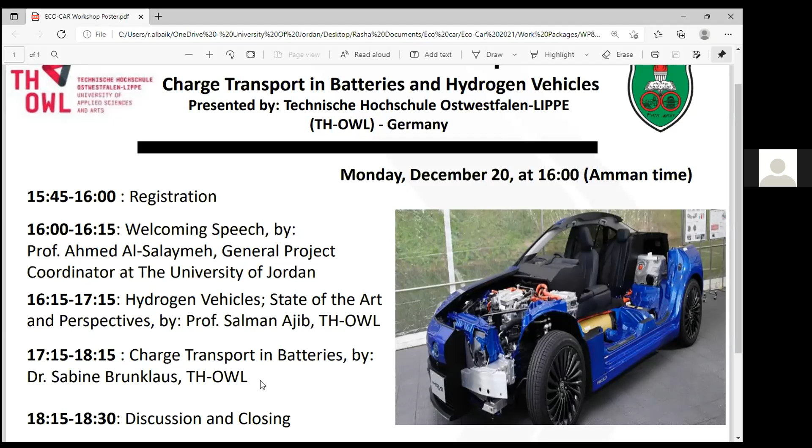So let me give a brief of the agenda of our workshop for today. We'll start with the welcoming speech by Professor Ahmed, the General Project Coordinator at the University of Jordan. And we will have another presentation on hydrogen vehicles, state of the art and perspectives, by Professor Salman Ajib. And then we will have another presentation by Dr. Sabine regarding charge transport in batteries. This will be for 1 hour, and then we will have 15 minutes discussion and questions for

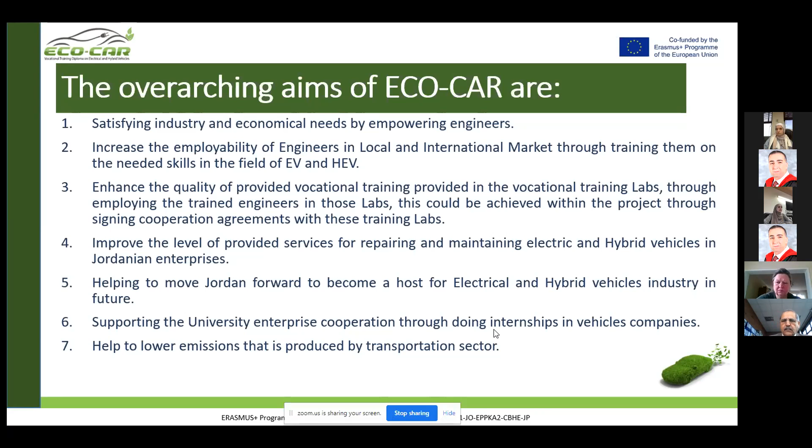Yeah, 2-3 weeks ago the COP in Glasgow finished, and they announced that now they want to have only a 1.5 degree temperature increase in the atmosphere, which means it would be more dependent on environment friendly measures.

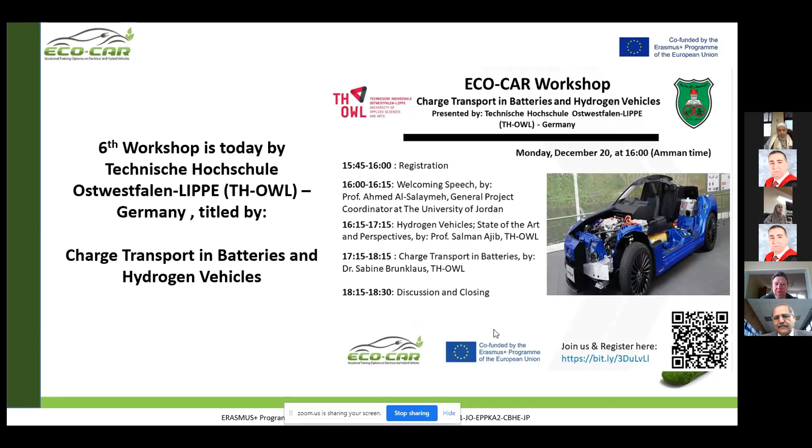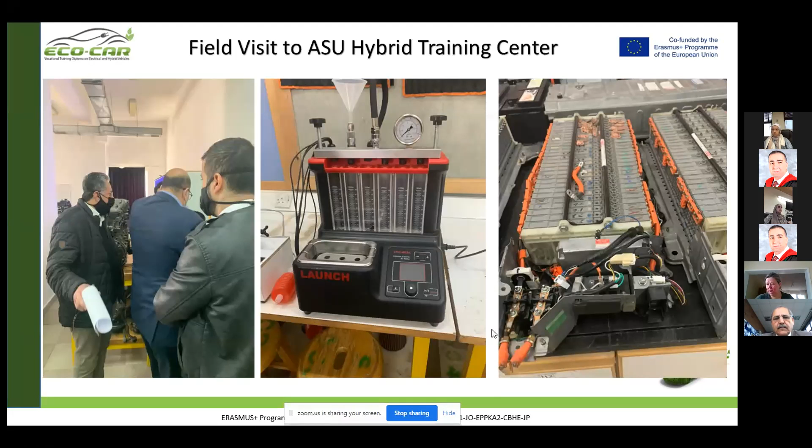Yeah, as I mentioned about the establishing of the labs, now we have the tender, and soon we'll have the equipment in different Jordanian universities. So our students, our trainees will also be qualified in this field. These are some labs at the Applied Science University, and this is an example of our visits to the car companies in Jordan to check with them the competencies that they need from the students. Next.

And about the courses, we have now started developing the curriculum, and this is the most important work package that we have. And within 3 months, all courses and modules will be ready in English, and then we will translate them to Arabic, and we will upload them on the platform, which will be open to all. Next.

Yeah, and as we said, our target groups are academic staff, students, also customers in electric and hybrid cars, and also employers of vehicle enterprises. Next. As we said, we have continuous quality assurance for the project, which is led by our partners in Greece, and therefore please at the end of this workshop evaluate it, because this evaluation is very important for us. Finally, about dissemination, we'll have many dissemination activities, and we'll also conduct some info days.

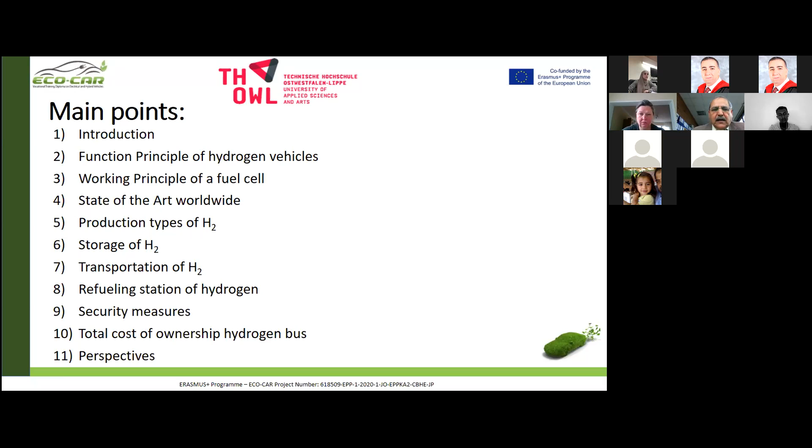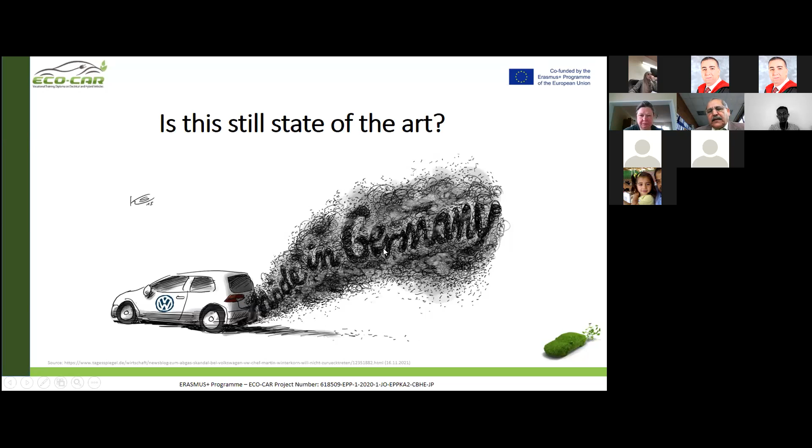That is the state: conventional cars make, yes, a great emission of CO2 and other pollutants. And of course, we don't want this situation. So therefore, there are many possibilities to avoid the CO2 emissions from cars. And of course, e-cars, hybrid cars and hydrogen cars are promising technologies to actually decrease these pollutant emissions, CO2 and other pollutants.

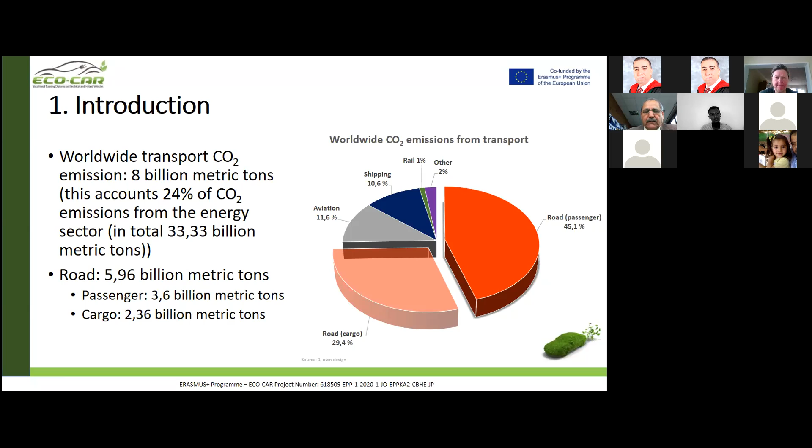Worldwide, transport vehicles make CO2 emissions of about 8 billion metric tons. And this accounts for about 24% of CO2 emissions from the energy sector. The total CO2 emission amounts to about 34 billion metric tons. From these, as I said, 8 billion are from transport vehicles, and from these, about 6 billion metric tons in total are for passenger cars and for cargo. In detail, about 3.6 billion metric tons CO2 from passenger cars, and about 2.4 billion metric tons from cargo.

And in total, as you see here, worldwide emission from transport is about 45% from passenger cars, about 30% from cargo, heavy transporters, about 11.6% aviation, shipping has about 10.6%. Railway, you see here, is a very, very small percentage because many railways are electrified. That means most of the railways use electricity as drive energy. Other about 2%.

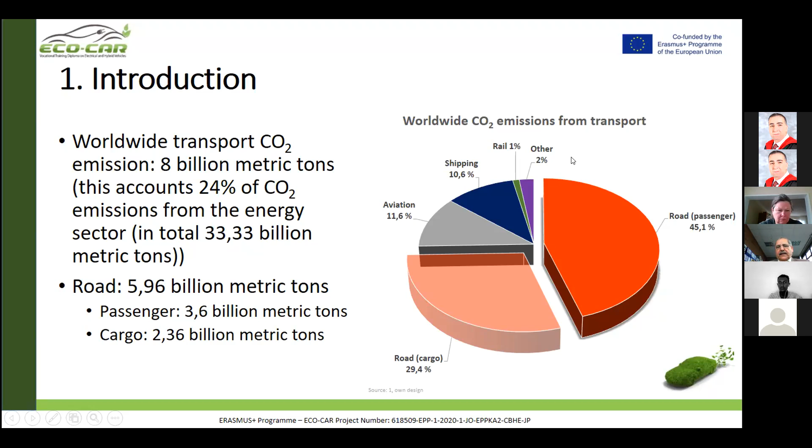Now, how can we tackle the net zero emission goal? Either stopping driving internal combustion engine vehicles, which is of course not possible, at least until now, or we have to shift the technology to other drive energy sources, and these could be biofuels, battery electric mobility, and fuel cell electric vehicles. The two last options are included in the objectives of our project. And we hope that at the end of the project, we can provide at least some information and some courses about the possibility of using these two technologies in the near future.

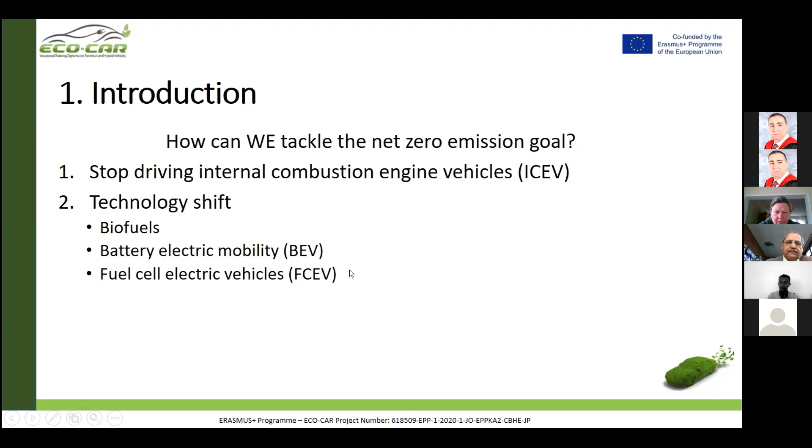So now, what is the function principle of hydrogen vehicles? We need a hydrogen tank, a hydrogen supply system, and of course, the heart of the system is the fuel cell stack to produce electricity. How is this realized? The fuel cell needs air, the oxygen and hydrogen supply, and through this process the fuel cell can produce current to charge batteries, and of course, as output, we have water and heat. We produce the current to charge the battery, and this battery can then, through a power control unit, drive the electric motor of the vehicle.

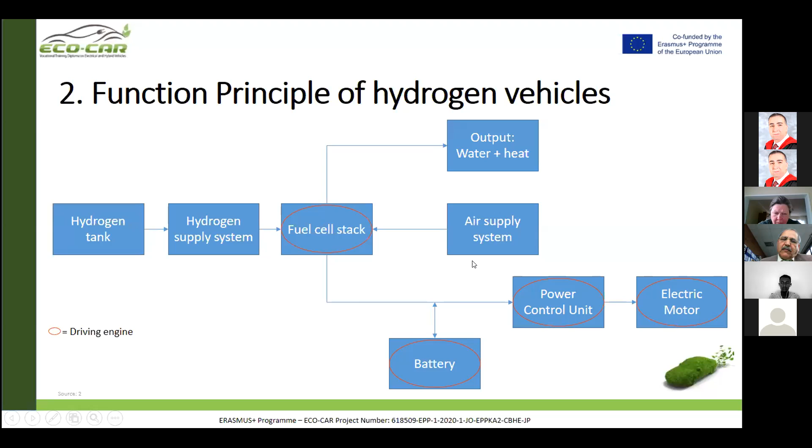So that is the sketch of the diagram of the hydrogen vehicle. And now we find this function scheme as components in the car. As you see, the heart of this process is the fuel cell stack. We need a hydrogen tank. We need oxygen, of course, from the air. Then we have our battery pack, our electric traction motor, the transmission system, power electronic controller, DC to DC converter, cooling system,

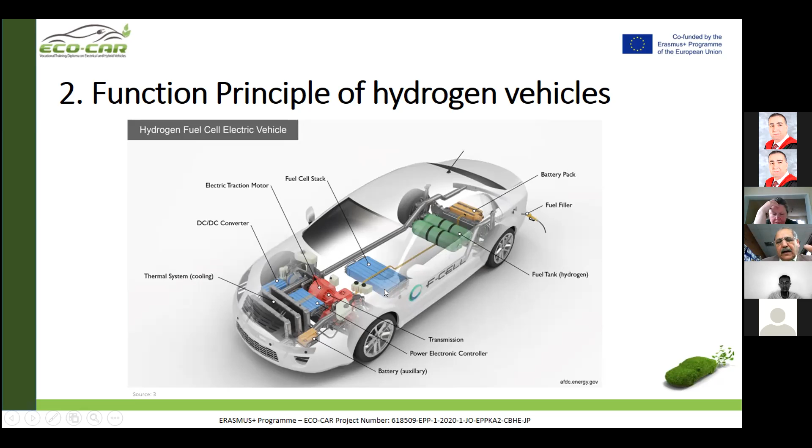and of course, for all cases, we need an auxiliary battery if the system cannot work for one reason or another. Then the car has an auxiliary battery to drive the motor for a short way, to be able to go to the workshop where the car can be repaired.

So how does the fuel cell work? The working principle, I think, is clear for many of you, but I want to present it shortly. As you know, the fuel cell has two important parts, anode and cathode, and we have the electrolyte here in the middle, the proton exchange membrane. Of course, we need hydrogen and we need oxygen, which we can take from the air. At the proton exchange membrane, the reaction occurs as follows: at the anode, supplied hydrogen splits catalytically into protons and electrons.

Then the protons pass through the membrane to the cathode. Yes, here. And electrons create a current output with an external load circuit to the cathode. As you see, that is our electron flow. And oxygen molecules react with the protons and the electrons. And at the end, we have here water and heat.

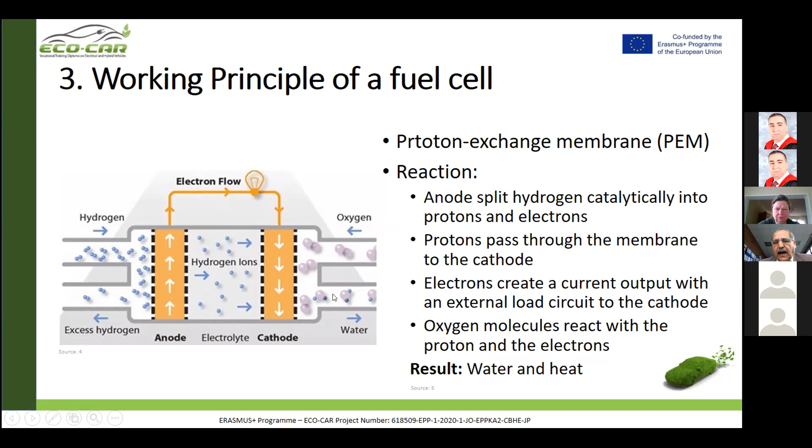So now I want to go into more detail about the polymer electrolyte, only as an example of electrolyte material. In this membrane, the electrolyte is a solid, special plastic material for the fuel cell. In this case, water reacts at the anode to form oxygen and positively charged hydrogen ions, our protons. So as you see here, we have oxygen plus 4 ions; the reaction is that water is split into oxygen and positive hydrogen. The electrons flow through an external circuit, as we see here.

And the hydrogen ions selectively move across the polymer electrolyte membrane to the cathode. At the cathode, hydrogen ions combine with electrons from the external circuit to form hydrogen gas. And the two reaction equations, as you see here: at the anode, water will be split into oxygen and hydrogen plus 4 electrons, and at the cathode we have the hydrogen plus the electrons. As a result, we have our wanted hydrogen.

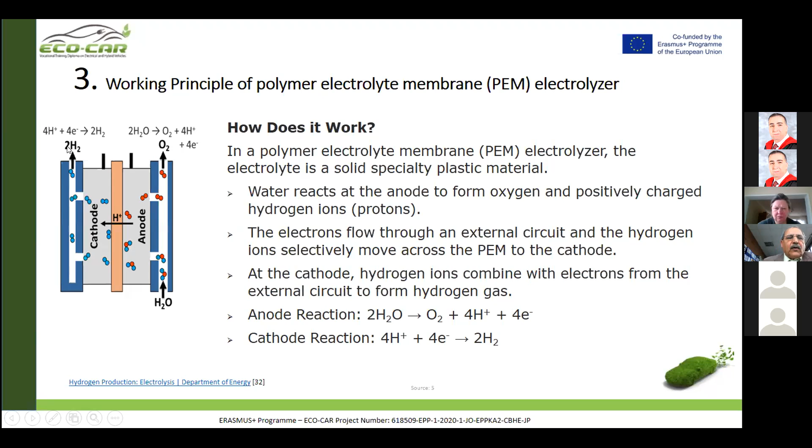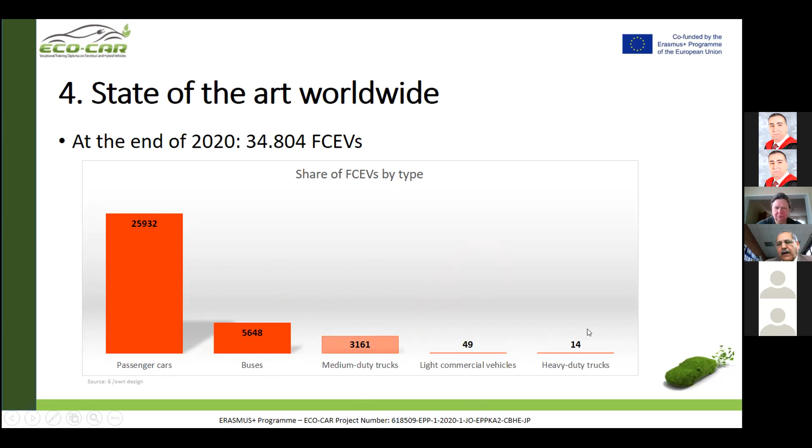So now about the state of the art worldwide. As you see, we have worldwide about 35,000 fuel cell electric vehicles, and these are distributed in about 26,000 vehicles as passenger cars, about 5,600 buses, about 3,000 medium duty trucks, about 50 light commercial vehicles, and heavy duty trucks, about 14 pieces.

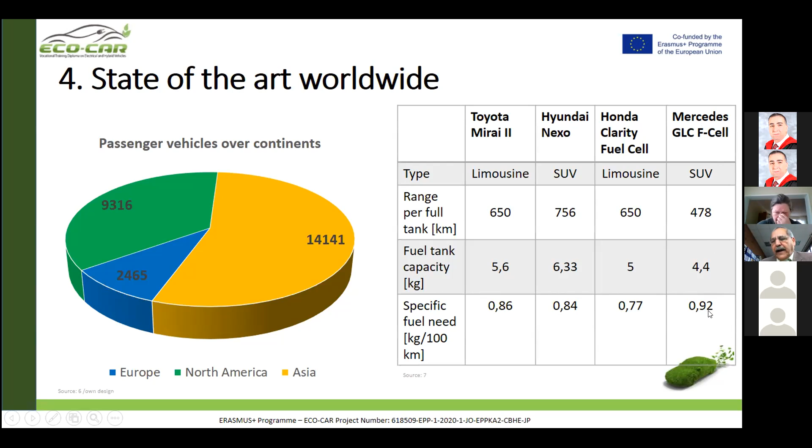You see the specific need is about 0.84. And Honda Clarity Fuel Cell as limousine is only 0.77. In contrast, the Mercedes GLC fuel cell, although this is also a comfortable vehicle, needs somewhat more than all other vehicles, about 0.9 kilograms per 100 kilometers.

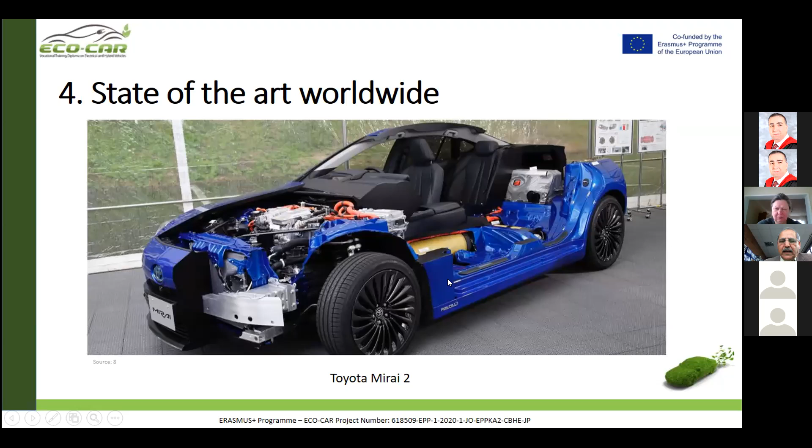So that is actually a picture of what you see in our poster. That is Toyota Mirai 2. And for your information, I wanted to show you the two most known hydrogen cars, Hyundai Hybrid SUV and Mercedes-Benz GLC Hybrid.

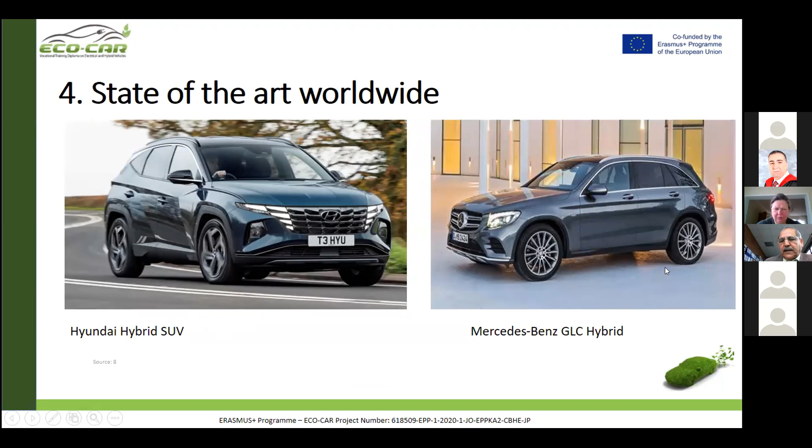So what about the buses, that means the big vehicles? The total number worldwide, updated only to 2020, is about 5,300 buses. Most are located in China. The major original equipment manufacturers are Foton AUV in China, Yutong Bus in China also, Toyota in Japan, and Hyundai in South Korea.

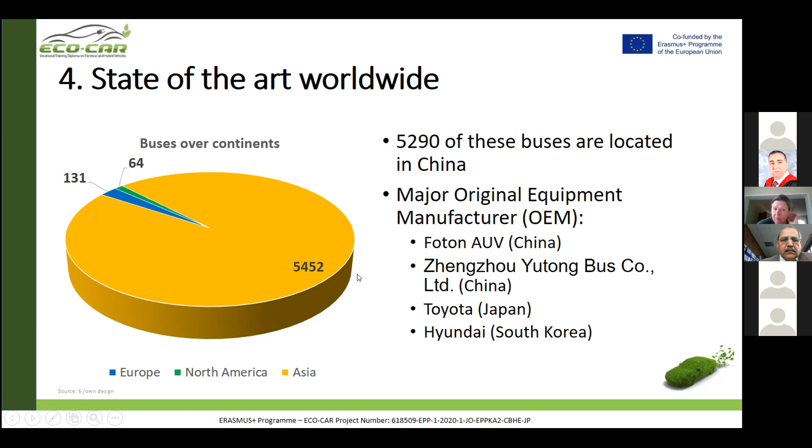As you see here, the buses by continent: the most is in Asia, North America is about 64, and in Europe the number is relatively low. These are some pictures of hydrogen buses. Here is Yutong, only for impression, and the different manufacturers, and you see the buses are very much wanted, especially for transporting tourists or large numbers of pupils.

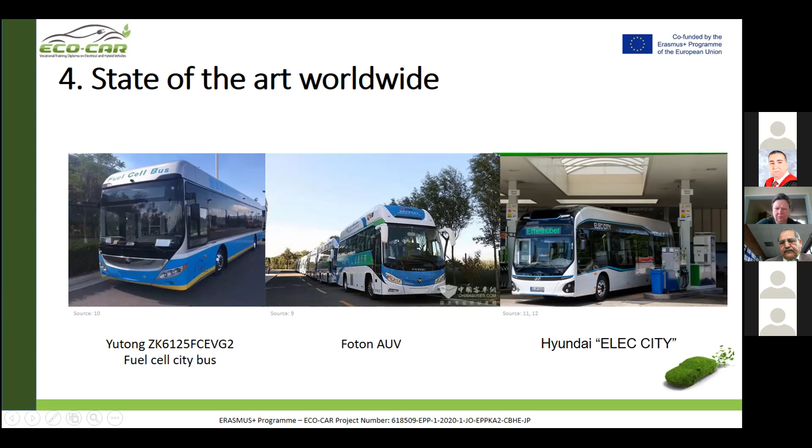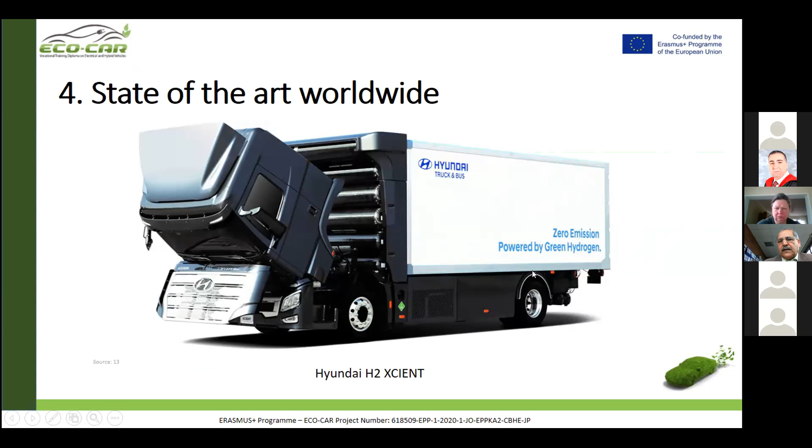Also in trucks and heavy transporters, there are some vehicles driven with hydrogen, zero emission, powered by green hydrogen. So now we spoke about the importance of hydrogen vehicles and the state of the art, and because hydrogen is the main fuel for such types of cars, we have to know how we can produce hydrogen.

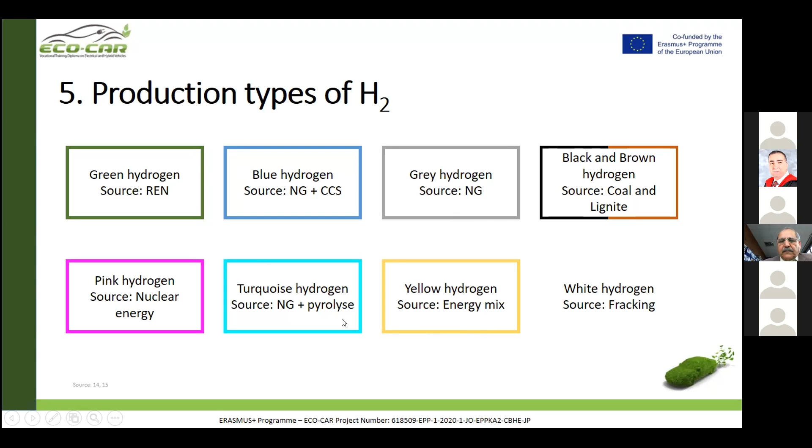It is yellow because here we have an energy mix, that means renewable energy, energy from carbon, and energy from nuclear. And white hydrogen is through fracking, that means through drilling into the earth; it is a hydrogen reserve in the earth. I don't want to explain every one of these possibilities, but as examples I want to show you the possible amounts of hydrogen and what we need as input and get as output in these three examples here.

As an example, when we take the steam methane reforming of methane and water, we have, for example here, 1,989 kilograms of methane and about 4,468 kilograms of water, and we have to supply 5.7 megawatt hours.

In this case, we get 1,000 kilograms of hydrogen, and the other is CO2, which can again be used, for example, for producing methane or for other purposes.

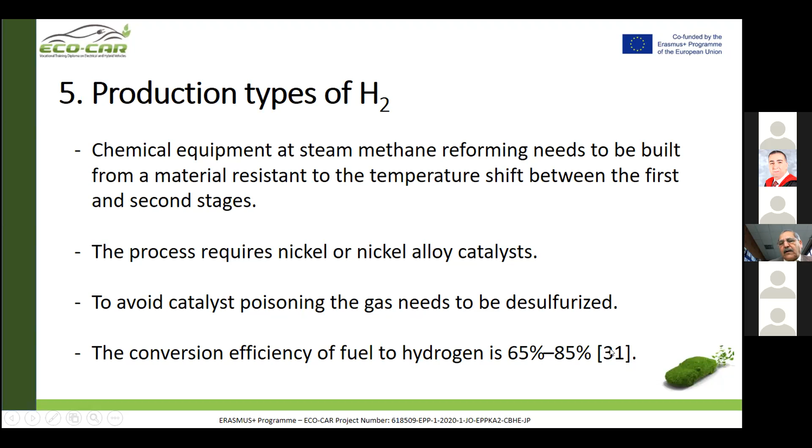So that was only an example, and for the other kinds of hydrogen production, I will only mention the possibilities. For gray hydrogen, we need natural gas or methane, in this case through steam methane reforming. Then we have black and brown hydrogen, where we gasify black coal or lignite. Then we have blue hydrogen from natural gas through steam reforming with carbon capture and storage.

I mentioned it before. Green hydrogen is green because we use only renewable energy resources to produce the hydrogen through electrolysis. Then we have pink hydrogen from nuclear energy through electrolysis. Turquoise hydrogen needs natural gas through pyrolysis. Then yellow hydrogen, electricity mix.

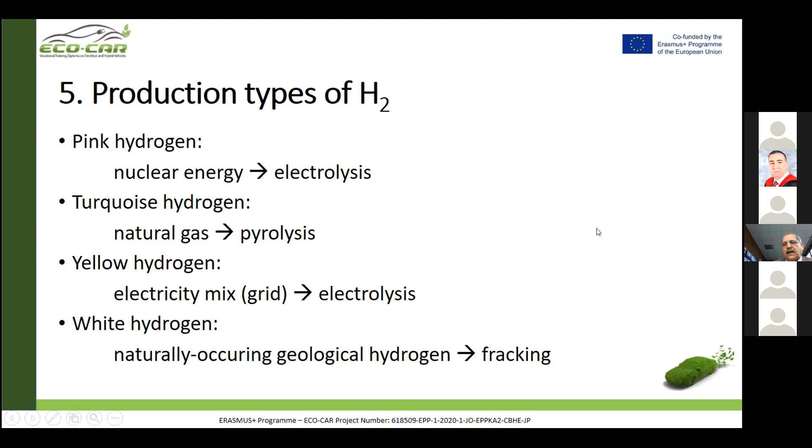Here we take the energy from the grid, and this energy is mixed from different energy sources, through electrolysis. White hydrogen is naturally occurring geological hydrogen with fracking. So that was about the possibilities of production of hydrogen.

And now, what about the production of hydrogen worldwide? You see, we have about 70 million tons of hydrogen produced through natural gas. From coal, we have about 21 million tons, mostly in China. From oil and electricity, about 1.9 million tons.

As a secondary product from other processes, we have about 50 million tons, for example from fertilizer production. And you see here the sources of production of hydrogen. As you see, natural gas is the main source. Coal is about 23% and oil only about 2%.

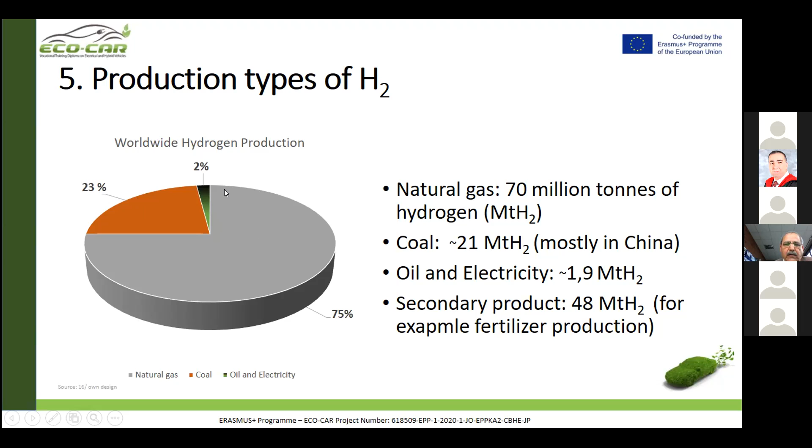So now, how can we store the hydrogen? Due to its physical and chemical properties, costs are higher than those for other energy sources. That is normal because hydrogen has to be stored under high pressure. Otherwise, we need a very big volume. And of course, high pressure also needs energy to produce it, but that is possible. Therefore,

I will here present the most used methods for storage of hydrogen. Either we can store it physically, based on compression, cooling, or a combination. That means compressed gaseous hydrogen. The needed pressure, as I said, is up to 700 bar. For example in Beijing, Sino Hydrogen is the company which uses this method. Then we can liquefy the hydrogen.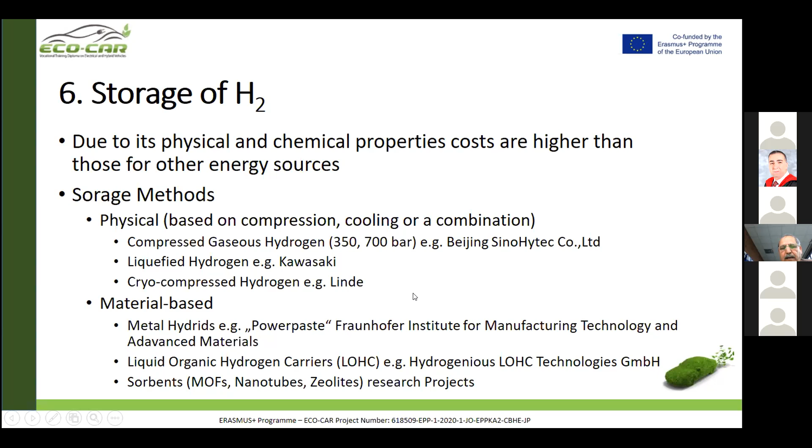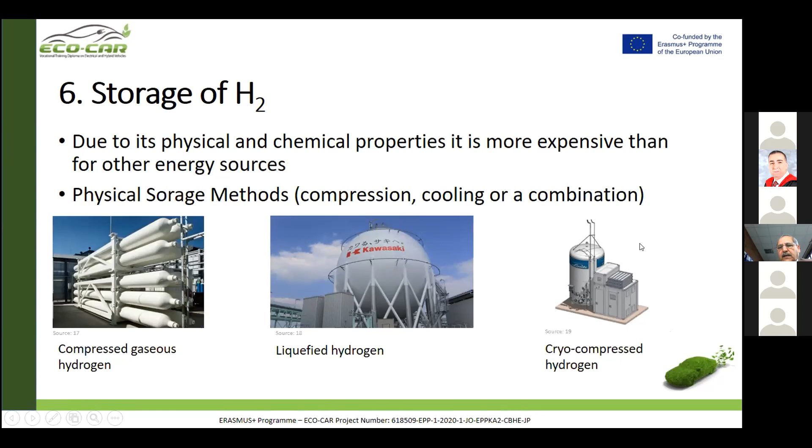Actually these three types are in research. They are not known as a big commercial market. These are only research results. So, as I said, the physical storage methods are compression, cooling, or combination. You see here compressed gaseous hydrogen in very big and long tubes, or liquefied hydrogen from Kawasaki. And cryo-compressed hydrogen, of course at very low, cryo temperatures.

So, material-based storage methods. You see here the tubes, metal hydrides such as PowerPaste, and liquid organic hydrogen carriers, chemical storage here, and sorbents, for example zeolite, metal organic framework, or nanotubes.

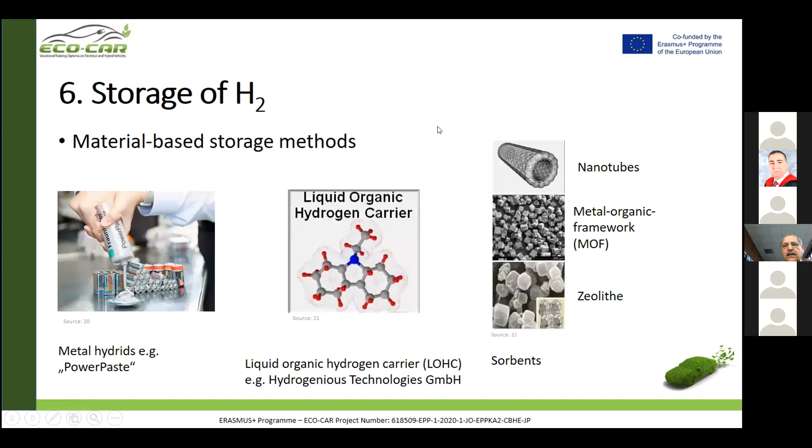So now, how can we transport the hydrogen? The methods used to transport hydrogen are either as liquid hydrogen, LH2, or through ammonia, NH3, and then we can split the ammonia into nitrogen and hydrogen, or as the liquid organic hydrogen carrier, LOHC, which we mentioned here. The most promising one until 2030 is liquid hydrogen, because of the cost, of course. Ammonia is in research, and liquid organic hydrogen carriers also as a research topic.

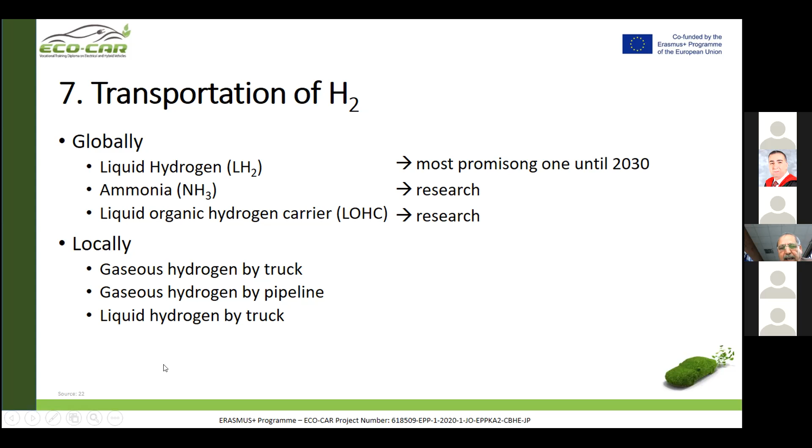That is globally, in ships, a known method for transporting hydrogen. Locally, that means over near distances, we can transport hydrogen as gaseous hydrogen by truck, as gaseous hydrogen by pipelines, or as liquid hydrogen by trucks. Gaseous hydrogen by truck is suitable for short distances and small amounts. Gaseous hydrogen by pipeline for large amounts for industry purposes, and liquid hydrogen by truck for distances greater than 300 kilometers, because in this case the mass of transported hydrogen will be more than as gaseous hydrogen.

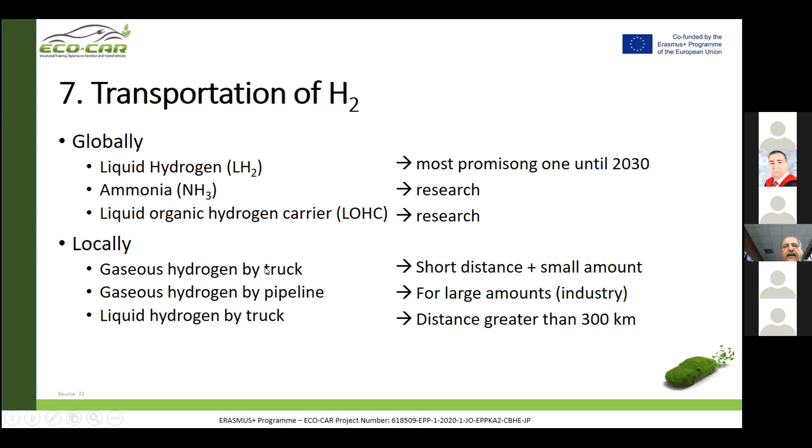Here as an example, I want to show you the ammonia production Haber-Bosch process, and how from ammonia we can produce hydrogen, in the opposite direction. For this process, we need a pressure of at least 200 bar, a temperature of about 450 degrees, and the catalyst is an iron-based catalyst. And this is the equation in two directions.

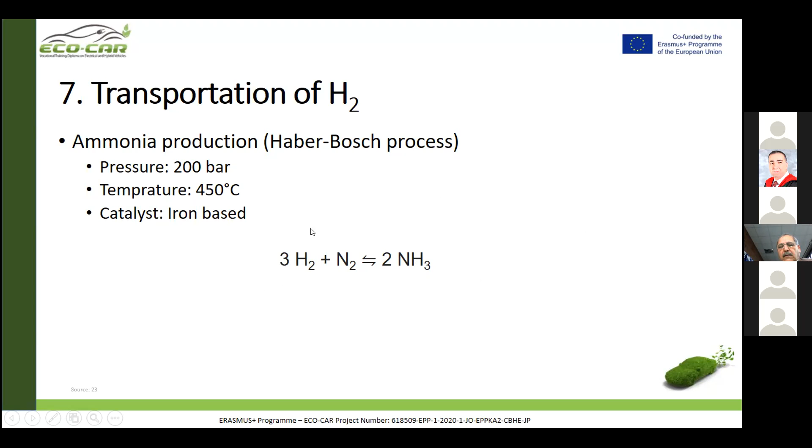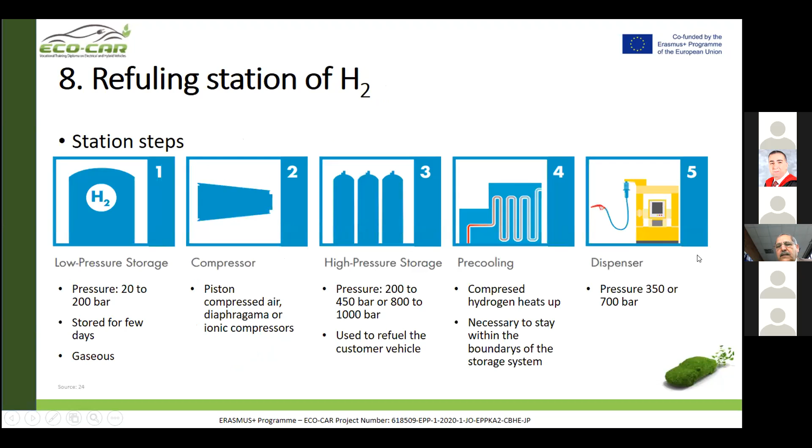So then what about the ownership of these refueling or refilling stations? Most are state stations, although about 75 are public stations, and the pressure of these stations is different according to this scheme we mentioned, either 350 bar or 700 bar or both.

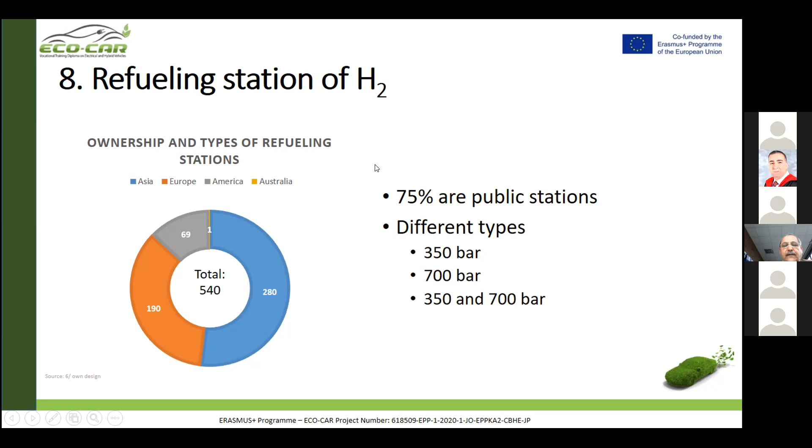Now about the stations: the distribution of hydrogen stations worldwide is about 540 stations in total. In Europe about 190, in America about 69, a very small one in Australia, actually. And in Asia, mostly in China, about 280 stations.

So we come now to the security measures. As you know, hydrogen stations are under high pressure, and therefore the security measures must definitely be kept. That means they have to be given a very high consideration.

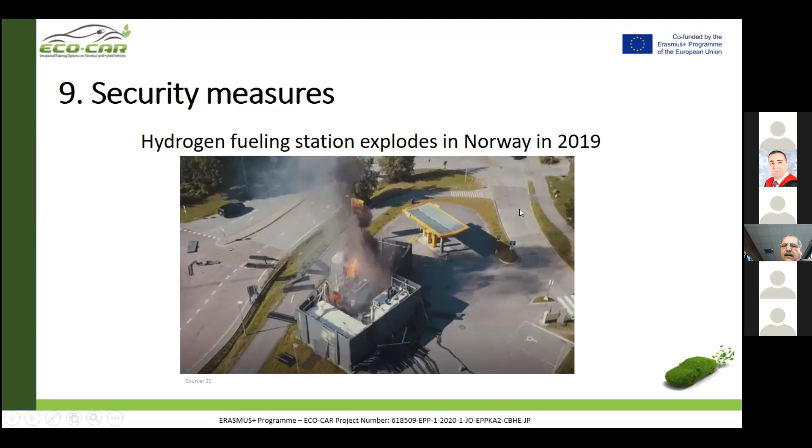And of course, this picture we don't want to see often. This picture was an explosion in Norway in 2019, and therefore there are many security measures which have to be considered in the installation of such hydrogen stations. And of course, security measures must also be considered in transportation and production of hydrogen.

Some of these measures: use non-combustible materials for the buildings of the refueling station, install hydrogen sensors at the exhaust of the tank, station, and the car, avoid ignition sources near the storage area. If a fire or leak is detected, an automatic shut-off is activated near the storage system. Classified electrical equipment should be used.

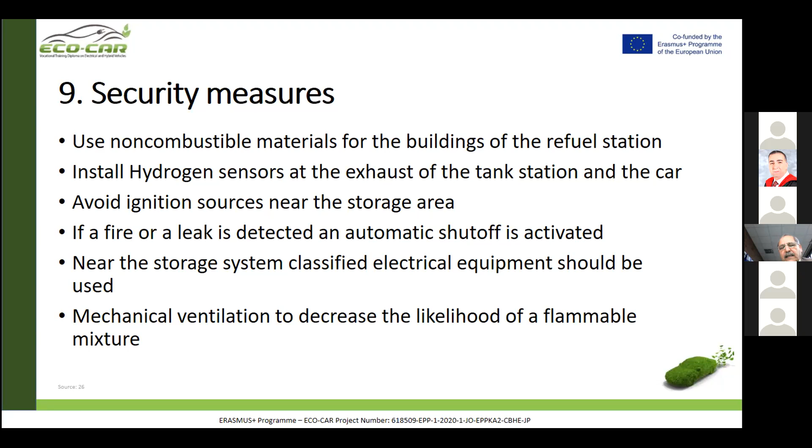Mechanical ventilation to decrease the likelihood of a flammable mixture. That means ventilators must be usable in case of danger. If an explosion occurs, the fire-fighting devices must be put to work, and also, when possible, mechanical ventilation must be put in operation to decrease possible incidents or accidents in the station or in the building.

So now we come to the economic part of using hydrogen vehicles: the needed investment and the cost of operating such hydrogen vehicles. This is based on a total cost of ownership analysis; subsidies are ignored in this case to see the basis of our calculations. We have no subsidies here on either vehicle purchase or fuel, and purchase and operation costs are for 2019.

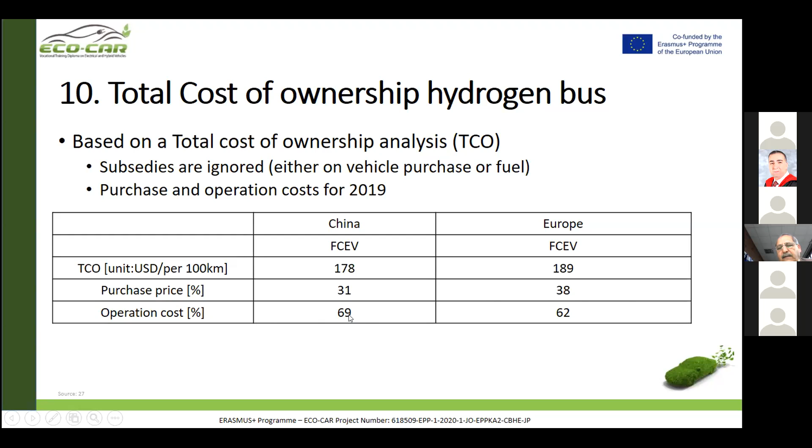You see here in China the cost per 100 kilometers for fuel is about $178, and in Europe about 190, somewhat more. That is, I think, realistic, but not much more. Purchase price in percent is here 31 and here 38 of the total price. And operation cost about 70%, in Europe about 60%.

Based on total cost of ownership, the purchase price here is in $1,000 per vehicle. In China, depending on the kind of vehicle, a fuel cell electric vehicle is about 314 or 315 thousand dollars per vehicle. In contrast, an internal combustion vehicle is only about 77,000. And in Europe it is about double China in both.

And operation costs are somewhat higher in China than in Europe because of providing the components for the vehicles. And here in Europe it is again higher than in China. The break-even with internal combustion vehicles in China is estimated to be 2027, and in Europe 2024.

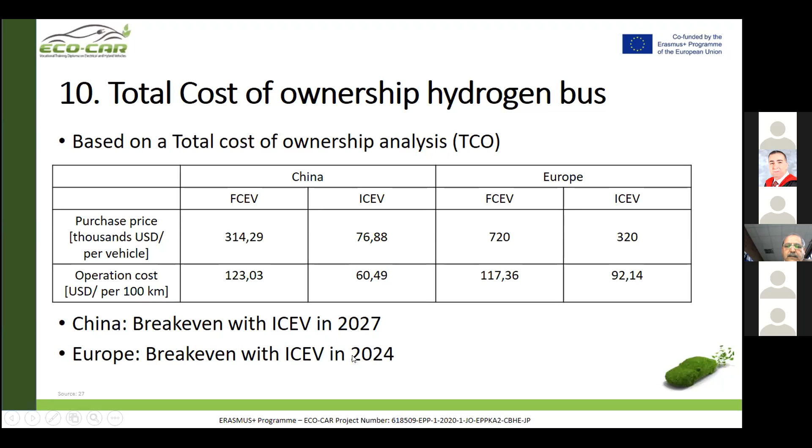Professor Salman, I just want to notify you that we have only 3 minutes. Yes, okay, thank you very much. Okay, I can make it faster.

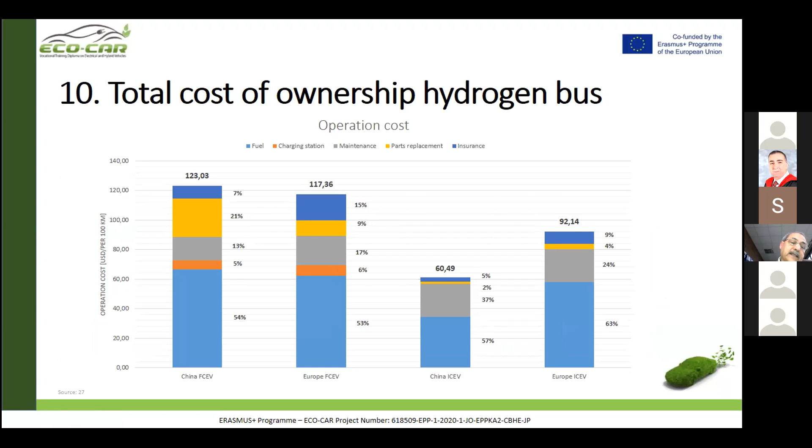Good. Here also operation cost, again, depending on the operation cost per 100 kilometer.

So then, yes, I come to the last slides: perspectives of using hydrogen vehicles with fuel cells. Decrease manufacturing costs, which is needed to make the spreading of hydrogen vehicles possible and economic, and increase efficiency, also long-term stability. Support technology acceptance, as good as the used products powered by fossil fuel. Expand the infrastructure with the long-term goal of nationwide coverage, cost competitive.

Then encouraging carbon-neutral production of hydrogen with an increased installed capacity. In China, it is planned to make about 100 gigawatt by 2030. In Europe, about an 80 gigawatt initiative. In Germany, about 5 gigawatt by 2030.

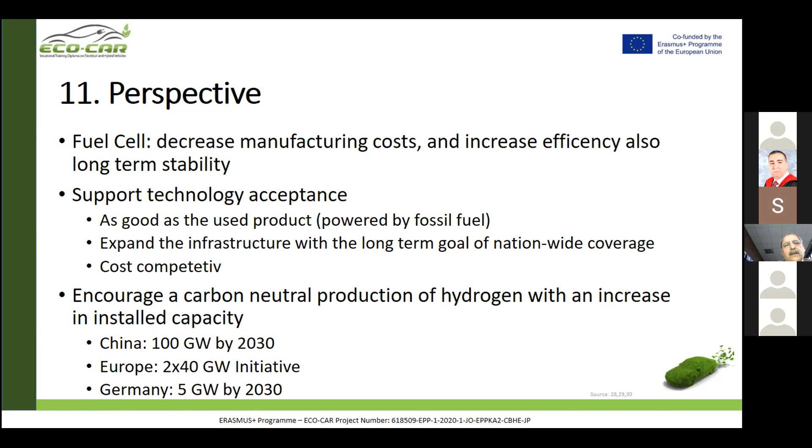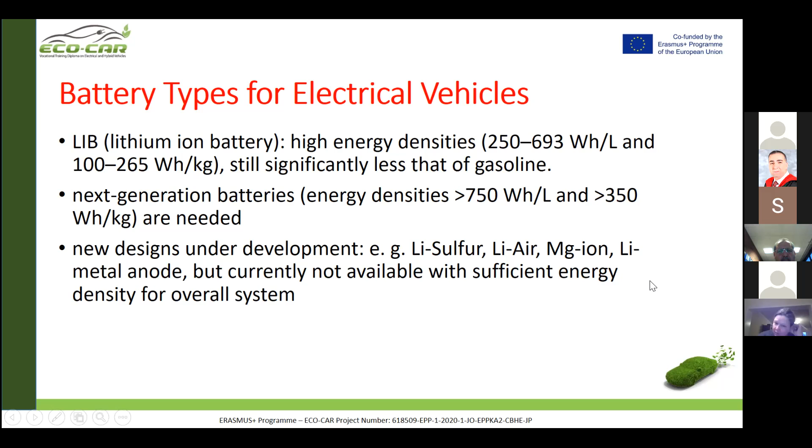And one word about these lithium metal anode batteries. They are currently not considered very safe, because if the battery breaks and the lithium is exposed to humidity and air, you will have a catastrophe. The lithium will react with water, and this battery will catch fire.

Now I come more to the transport of charges in these batteries. In principle, a battery or accumulator is built of a stack of galvanic cells. Let's have a look at these galvanic cells. A very simple galvanic cell is built of two electrodes lowered into an electrolyte. This electrolyte can transport ions, mostly ions that are in solution in this electrolyte. The electrolyte is usually liquid. It can also be a molten salt.

If you divide these two parts and have a different electrolyte for each electrode, then you have two halves of one complete cell, or two half cells. For example, one zinc electrode and a copper electrode. You need to connect these electrolytes by a salt bridge, or have in the middle a porous membrane that allows for the exchange of cations and anions, so that the electrons can still flow in the outer circuit.

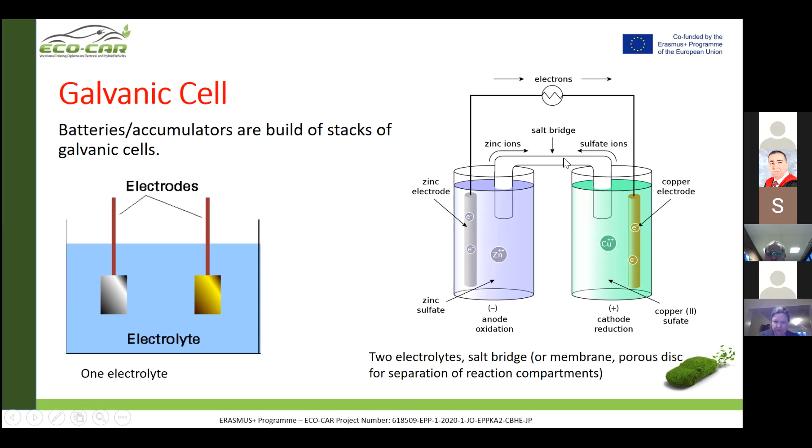If there's no charge transport, then the electron flow will of course stop in the outer circuit, and the battery will not work. But if you have a connection for the exchange of charges, then this battery is functional. Good. Next one.

Then you can have a look at the electrochemical series to see which voltage will be produced in this cell. This very popular lithium ion battery has a very favorable normal potential of -3.03 volts. Materials that are very high in this electrochemical series produce higher voltages when combined with materials on the lower side of the series. But I think you all know this.

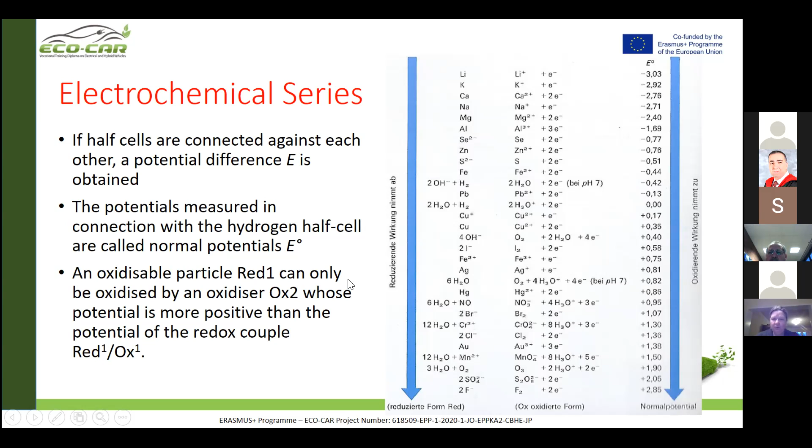So now I come to the Nernst equation that is used to calculate the voltage. For the half cell, you calculate the voltage from the normal potential. You have the normal potential at certain temperatures and certain concentrations, and here you have a correction term with the temperature, the charge number, and the actual concentrations for oxidation and reduction.

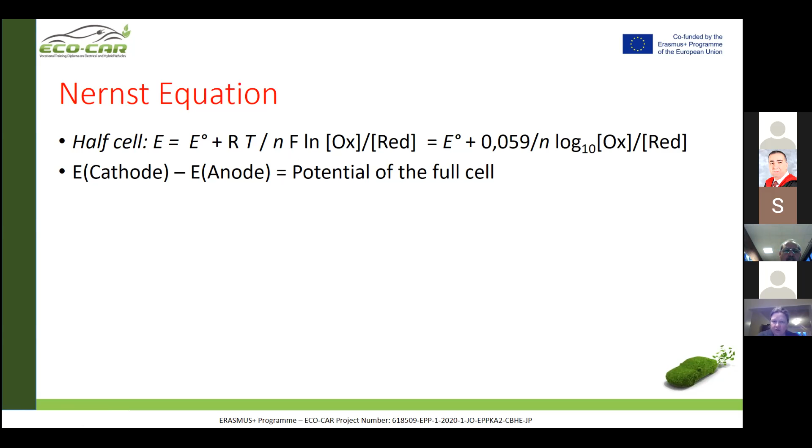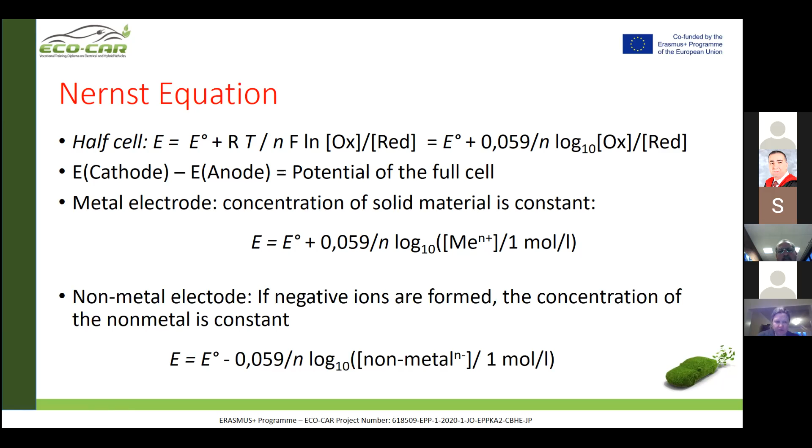There are some special cases. If you have only a metal electrode, then you have this simplified equation. For non-metal electrodes, there's also a simplified equation you can see here.

Sometimes you have an overvoltage, which means that the battery is not working as you want in the desired fashion. This occurs when all steps of the reaction are fast, but they slow down due to high diffusion times to the electrodes. If the ion needs a long time to diffuse to reach the electrode because of diffusion hindrances, obstacles, then this battery is not working as desired.

Even if you have well-mixed electrolytes, there's this stationary boundary of thickness 10 to 100 micrometers that does not move, very close to the electrodes. This is the diffusion barrier. And this equation applies to these diffusion obstacles.

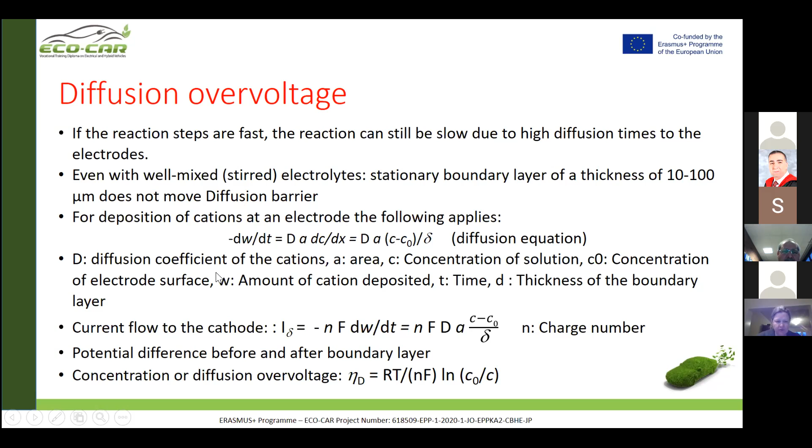Okay, I can go to the next slide.

Regarding the electrode kinetics, that's the speed of the process at the electrode surfaces. There are individual steps for an electrode reaction that can take place even in a battery. So the diffusion of the substances involved to the electrode slows down the process, is one step in the process. There's a possible reaction in the layer directly at the electrode, so that also a very undesired reaction can take place, like plating of the electrode by lithium.

You have adsorption of the substance on the electrode that is sometimes desired, sometimes not. Transfer of electrons via the electrode, a desorption or detachment of the substances from the electrode, so that you have the charging process and you have the discharging process, and in all these processes you have to also look at the electrode kinetics that are influencing the overall reaction.

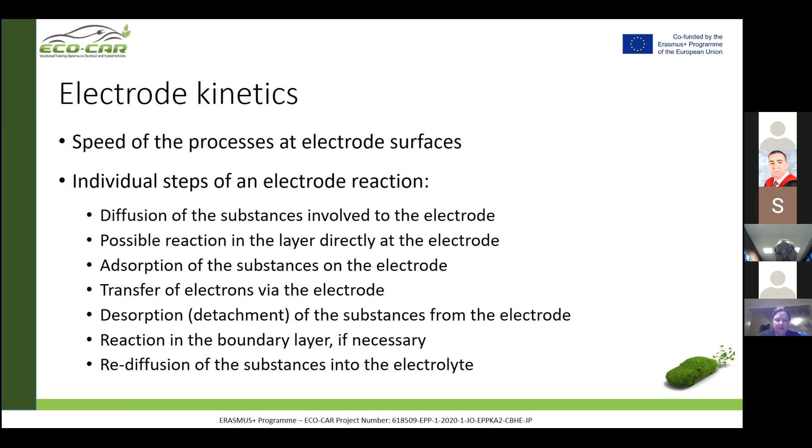There are also sometimes reactions in the boundary layer if necessary, or the rediffusion of substances in the electrolyte that can take place in the charging and discharging of batteries.

If you look at the ion mobility, the actual transport of ions within the liquid electrolytes, you have really quite simple equations. You of course expect that large ions will be drifting slowly and have low conductivities, and the drift velocity you can calculate by: drift velocity is ion mobility times the field strength.

And two forces are acting on the ion. One force is the field, the electrical field: the number of ion charges times elementary charge times electric field strength on the one side, and on the other side you have a force acting against this field force. This is the retardation force, 6 times pi times the viscosity times the radius of the ion times the drift velocity. When the drift velocity is reached, then both forces are equal.

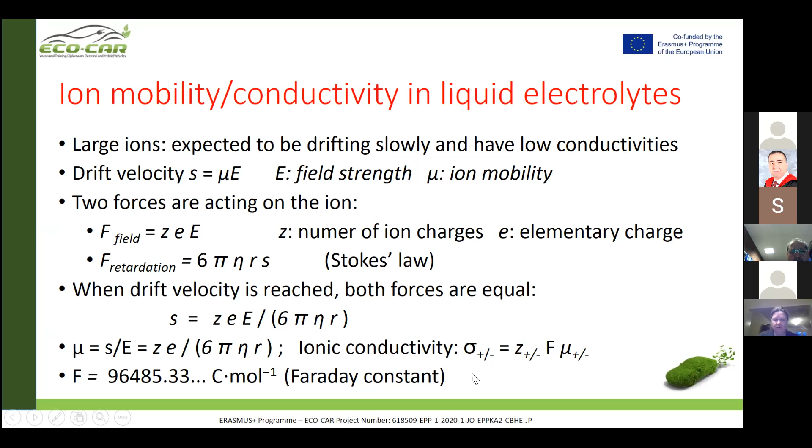That is this number of charges times electric field strength times ion mobility. Oh, no, sorry, not the field strength, but the Faraday constant that is given here in the last. So sorry.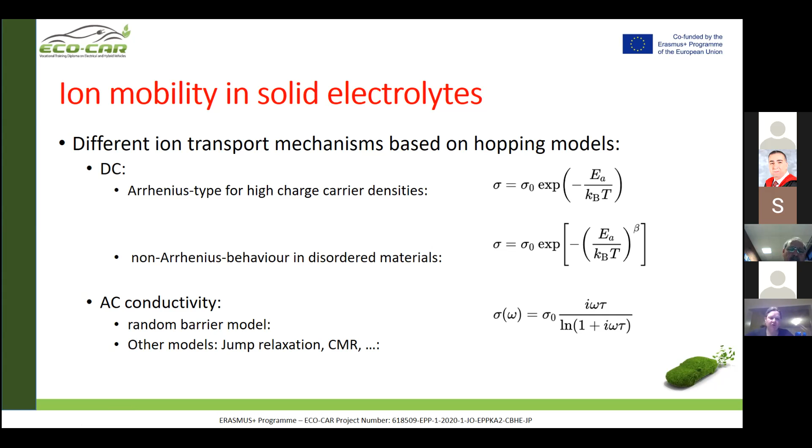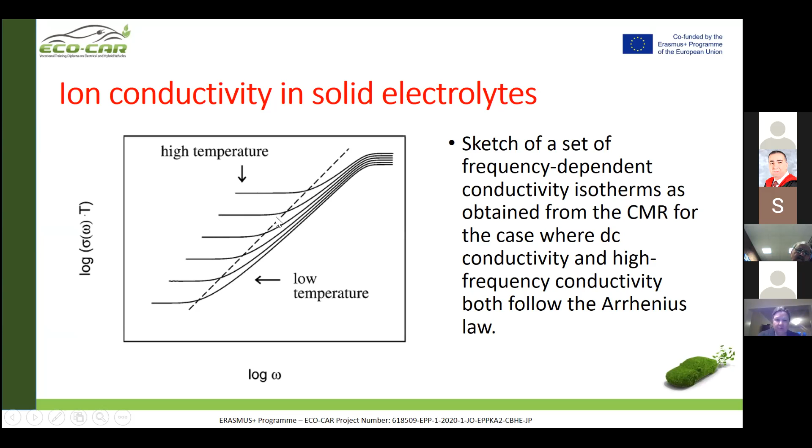If you plot conductivity times temperature against the frequency, you get dependencies like this. Here you have the so-called direct current conductivity. This is the important current conductivity of our batteries. And you see here this Arrhenius behavior. You can draw a constant line, but it's only for illustration.

If you have a look at the lithium-ion batteries that are currently used in cars, some of the batteries really look like the battery you know from your home use. They are cylindrical, especially in the Tesla cars. I think they're still using 7,000 of these cylindrical batteries. That's curious, but I think that's still state of the art.

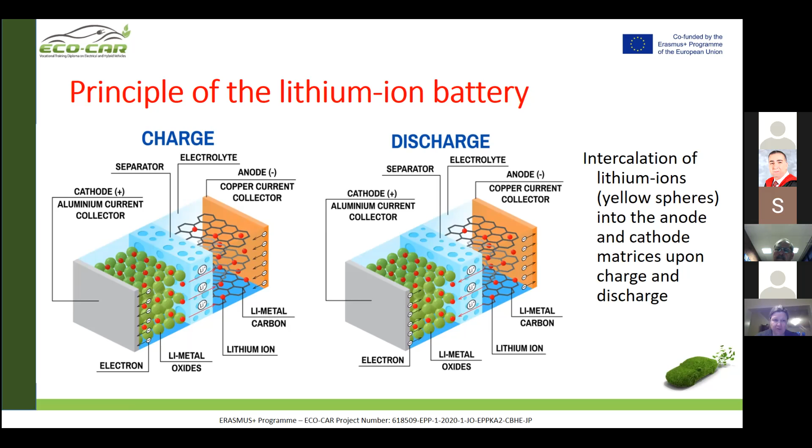So lithium ions are transferred from cathode to anode during charging, and their speed is controlled, of course, by the intercalation rate and the diffusivity of the lithium ions. If I have a high charging rate, lithium plating takes place at the anode surface, and the cell temperature increases rapidly. If you feel that your lithium battery is getting very hot, then it's not a good sign. That means that some degradation is taking place.

So-called lithium plating. So you get lithium directly on the electrode, and that's not the desired place. You want your lithium intercalated in your materials, the oxides and the carbon. So this high charging rate can induce reduced capacity, reduced life, and of course reduced safety, because the cell is getting very hot, and there's the risk of catching fire, of explosion.

So there are some attempts to increase the charging rate by pre-warming of the cells to improve the electrode kinetics. Also the electrode kinetics, as I demonstrated before in the equations, are influenced by temperature. If the temperature is higher, then of course the kinetics are improved, and we can charge with a higher charging rate.

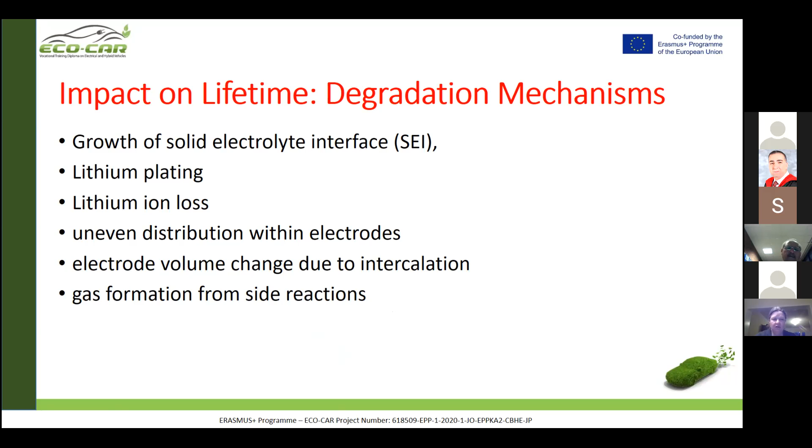The electrode volume can change due to intercalation. So if we have intercalation of ions, the electrode itself can grow. That's also not desired, and the battery pack will increase in volume. Of course, the companies take measures against this electrode volume increase. They apply pressure from outside to keep the battery pack in the desired volume, but nevertheless, sometimes the pressure from the inside gets too high. And sometimes you have gas formation from side reactions that are not desired, and this gas formation can also increase the volume of the battery or the electrodes, and what can follow is a rupture of the battery.

Environmental conditions are very important. The performance of the battery, the charging rates, and the degradation are of course affected by the temperature, as said before. At high temperature, we have a high charging rate, but the undesired solid electrolyte interface will grow, and some other undesired side reactions will take place. Low temperature slows down the solid electrolyte interface growth, but instead lithium plating occurs. That is also not desired.

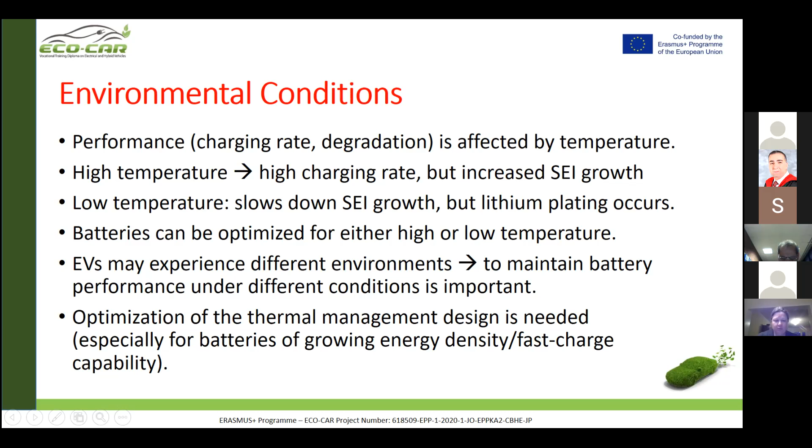Batteries can of course be optimized either for high or low temperatures, but then this optimization is only for one temperature. But our electrical vehicles may experience different environments. So to maintain battery performance under different conditions, it is very important to look at the different environments that can be experienced by the battery. Optimization of the thermal management design is needed, especially for batteries of growing energy density and fast charge capability. For these desired batteries, we need more optimization and difficult thermal management.

Now I already come to the end of my presentation. A lot of research activities are currently going on all over the world to mitigate thermal runaway and other obstacles. Novel battery materials are being developed in several research institutions in Germany, in Europe, in Asia, in the US. But when we look at all these novel battery materials currently under investigation, the cell performance in most cases is not optimal. Aqueous electrolytes, for example, are non-flammable, but they have a small electrochemical stability window. Solid-state batteries have high mechanical rigidity, but high interfacial impedance and poor cycle stability.

I know that some German research and technology organizations are still working on lithium anode batteries that have many safety problems. But there's one general observation currently made in the research field. The German electric vehicle companies work together with several research and technology organizations, mostly in Germany, but also in Asia. They're mainly working on an LG Chem battery, and in contrast, Tesla, one provider currently building electrical vehicles, is still using Panasonic batteries.

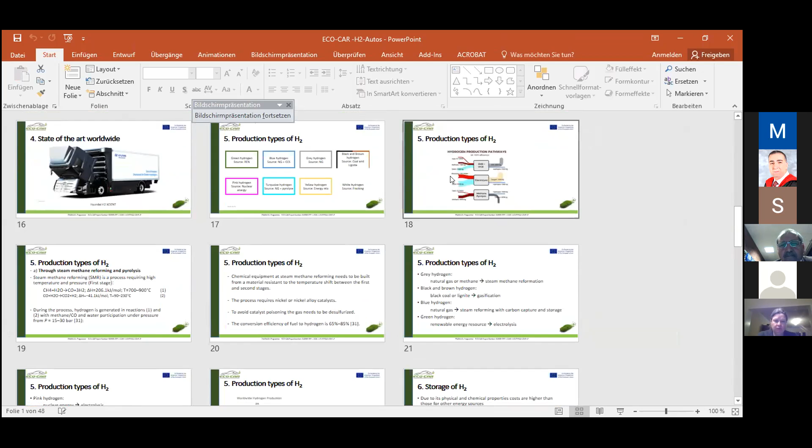Can you see my screen? Yes. No, I followed all your presentation. I followed all of it. Yes, okay. All right.

You see here electrolysis, steam methane reforming, and methane pyrolysis. In these cases we have a big part of carbon. But when we use electrolysis, you see we have only hydrogen and oxygen. It depends on the method we use to produce our hydrogen. Therefore that is actually not desirable. But the costs of hydrogen production here may be cheaper than this one or this one. That depends on the energy source we use to produce the hydrogen.

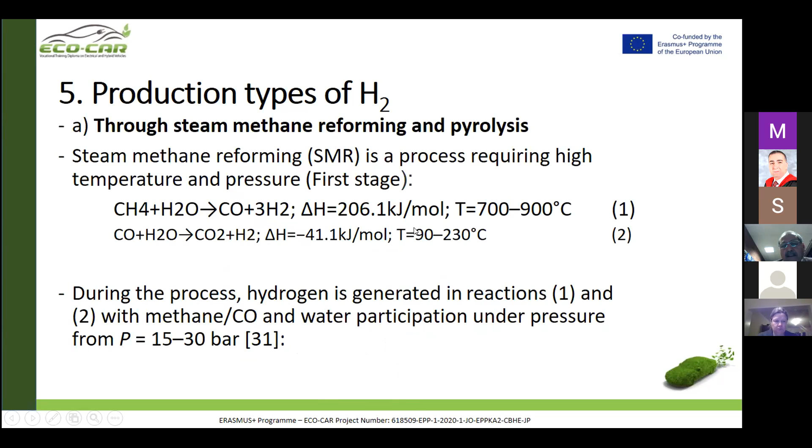There are many methods, and as I said, when we use carbon for producing hydrogen, again it is a closed loop, and maybe that is not very environmentally suitable. Is it clear? Yes, it's clear. You know what I'm asking? I'm asking from the point of view of the environment. Which one will be more friendly to the environment?